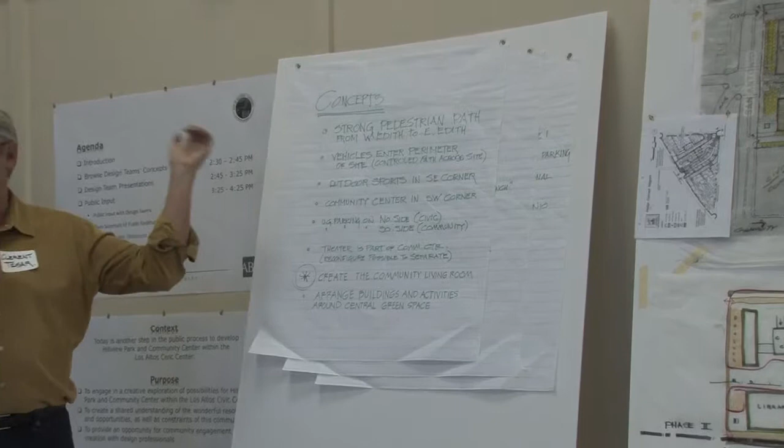I think we could start out with what we believed were the key concepts. Maybe I'll go over here. Thank you. It looks like we all drank the same Kool-Aid. We believe in a strong pedestrian path from West Edith to East Edith, reinforcing pedestrian and bicycle connections and downgrading the vehicular connections. And in fact, what we encourage is a north entrance and exit for civic vehicular traffic and a south entrance for community traffic.

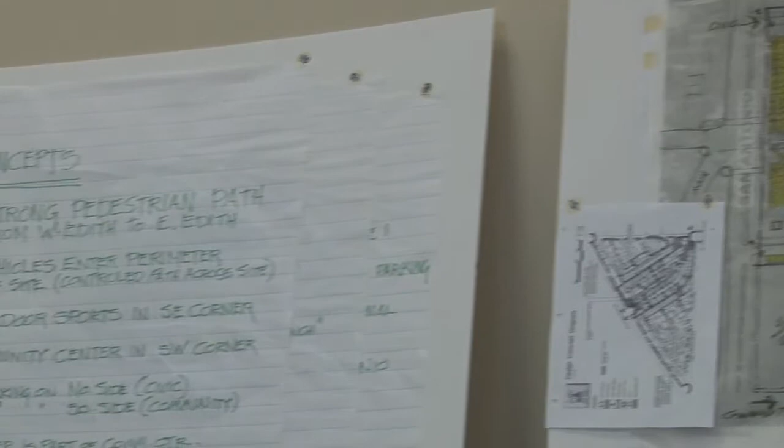We do have, I'm going to just jump right over to the drawing. We do have one connection. We flipped the police parking and relationship to the parking building so that we could have basically 2 cul-de-sacs of drive, but they would be connected. In my experience, the fire department's going to want that, and the police are going to want that. But we really wanted to decommission the road right down through the middle. That's the sweet spot. Let's reserve that for pedestrians.

Again, we identified all the outdoor sports to the southeast. They seem to have a comfortable adjacency. And the community center was to the southwest in this zone. A key concept is underground parking. It seems like that is your destiny if you want green space and all of the activities and all the buildings. But there is a challenge there, price, right? So as we did our numbers, we realized how important that decision is going to be for you as a community. It's not something the architects can solve. That ratio is cold, hard math.

We also grouped the theater with the community center. And in this scenario, we showed the theater tucked up against this property line, but with service and the dock and the scene shop tucked in here, kind of in the private side. And then the public side would be facing what we like to believe is the outdoor room, enlarging what you already have. I don't know if we want to go to specifics of the plan or talk about opportunities that are embedded in it. Peter, do you want to walk through the plan a little bit more, and then we can touch on opportunities and some of the problems or challenges in it? Okay.

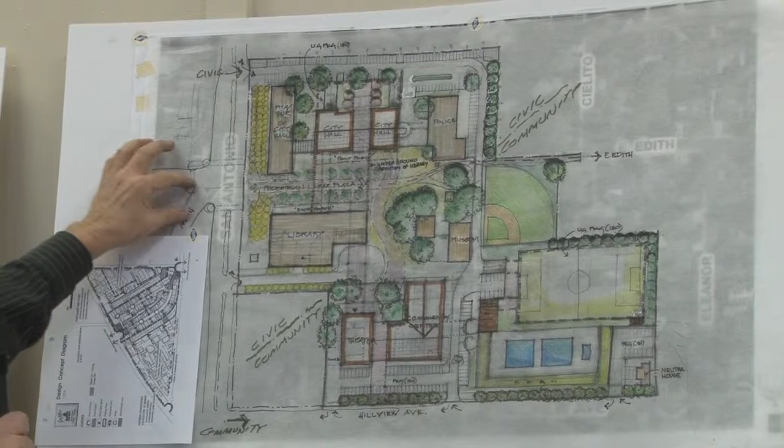Yes, well, we're trying to create sort of a real community feel here, and the connection, Edith, and this whole connection of downtown with State Street and Main Street coming together, we really wanted to be the main sort of pedestrian way. And so this is basically just sort of a community outdoor space that's connected with the museum space. And I think that's something that's typical of all of our schemes. And also we're connecting with Edith and leaving the ball field where it is.

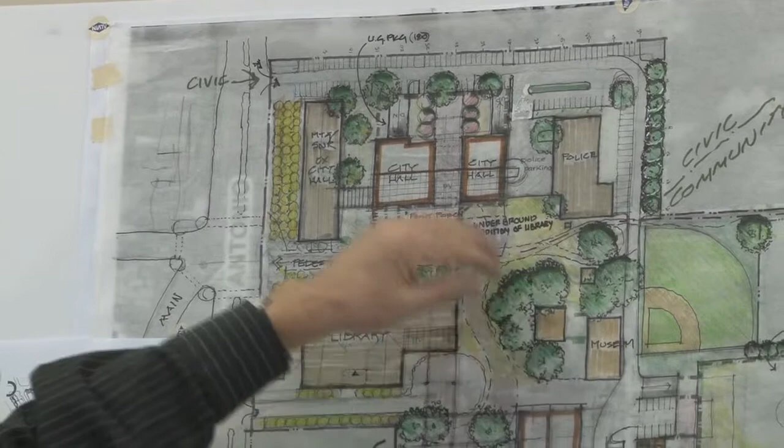We did sort of think about the second phase on how the government buildings would work too. So we thought we would keep the existing town hall or existing city offices where they were and put a new city office building here. This would be council chambers, these would be the offices, and keep this parking that seems to work pretty well and gives access to the police area, create an entry, and then this sort of pedestrian way would connect to this nice pedestrian plaza, connect with the library, connect with the museum, and also connect with the community center.

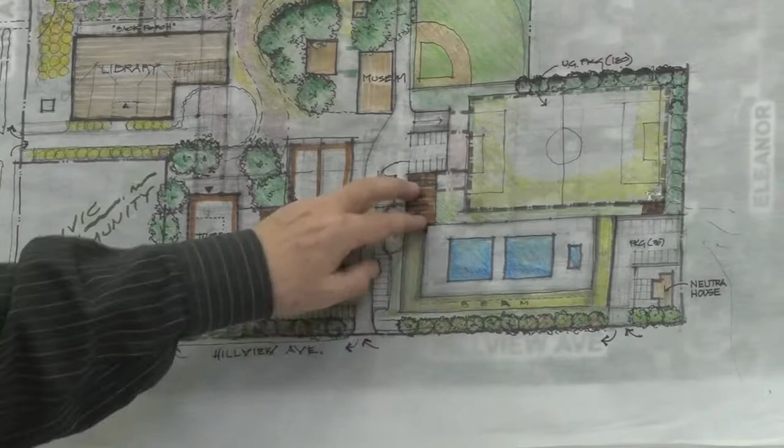Another thing that we were pretty conscious of was what was it going to be like on Hillview. So we took the community center and the theater, pushed it back, and put some parking to buffer or to increase the distance from the community center to Hillview. Also, we wanted to put the pool here and the soccer field, and what we thought we would do was build a berm, or about an 8-foot wall, and sort of maintain the treescape along Hillview, so it had a real residential feel.

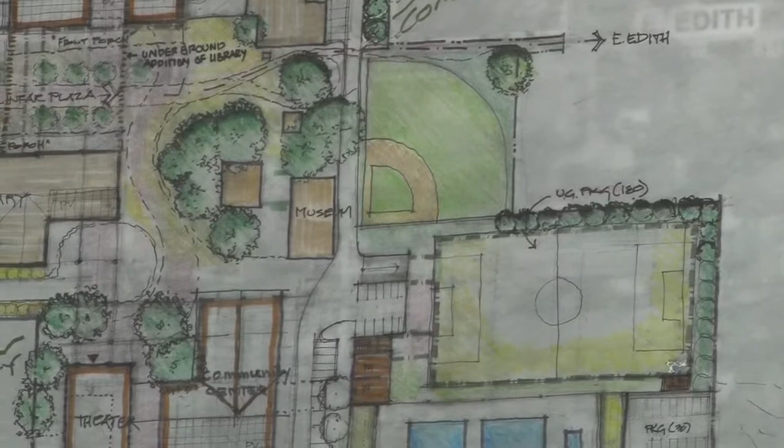But you wouldn't be able to see the swimming pools. There's sort of the sketch right here, kind of shows an 8-foot wall, a berm, and a street tree. So along Hillview, you just see sort of a natural streetscape, and it would sort of acoustically block the noise from the pool. And then we get the soccer field and the ball field working together. And I'll touch on a couple of opportunities that we see.

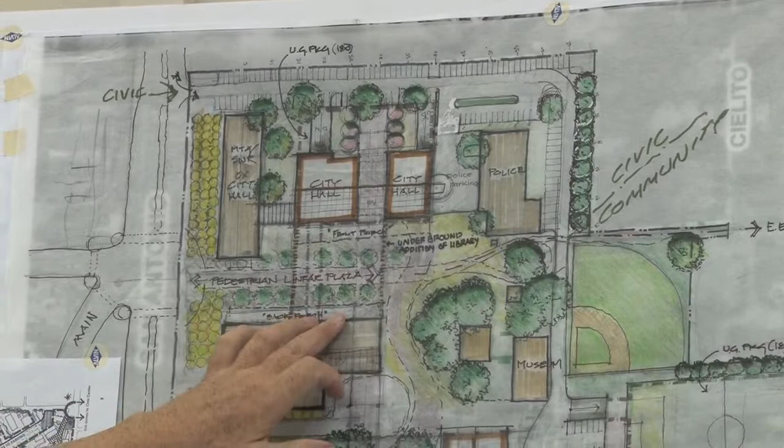By enlarging this outdoor green space, we start connecting all of these buildings visually to each other, trying to create that dynamic between them. We see a real opportunity to continue what we call the modern California ranch style. This building would remain, and this building would remain. We see this as essentially an annex to the new city hall. I don't know if this is clear, but we're visualizing that there's about 180 to 200 parking spaces under the city hall that are accessed from the north. And there's a connection for a future expansion to the library that would be underground. So there would be some clerestories or some skylights in the orchard as you walk through it. And that would connect the library now to all of the parking.

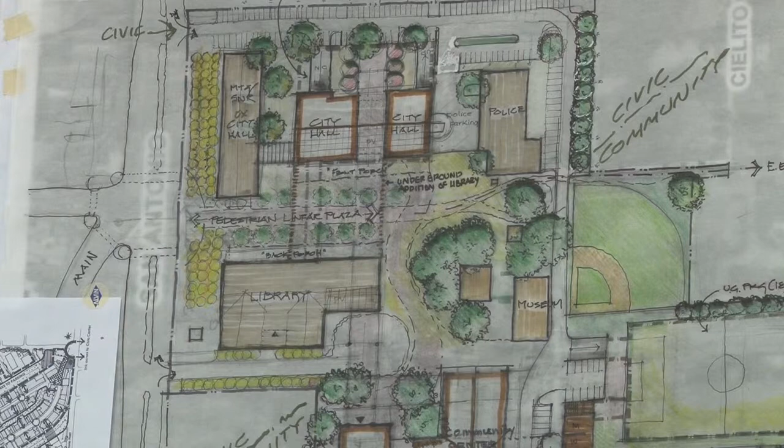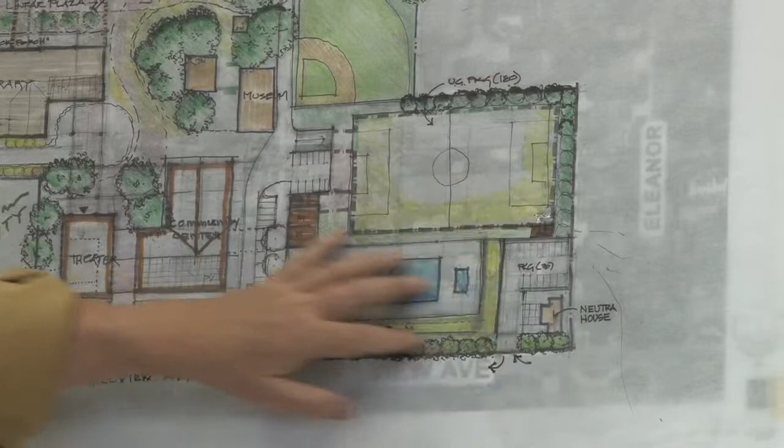We also think that there's an interesting opportunity to reinforce the Neutra design aesthetic, which is a little different than the California Ranch. The Neutra house has quite a bit of history. We see a couple of gazebos that can be possible that start to create a collage or an assembly of buildings that starts to feel like a mini campus, if you will. Go to the third one. We only have about 2 minutes left.

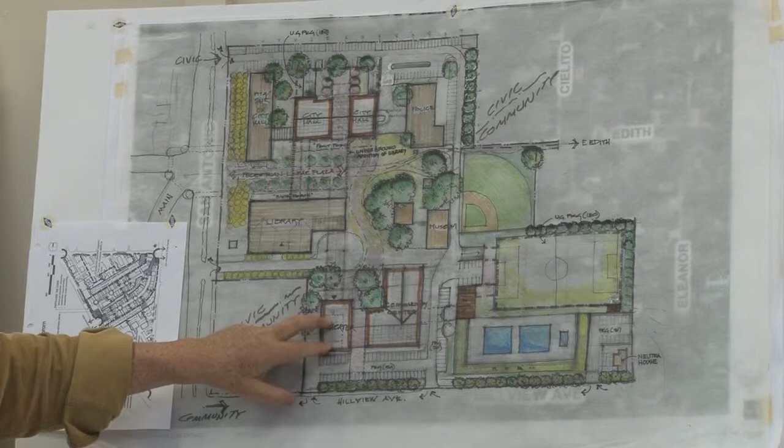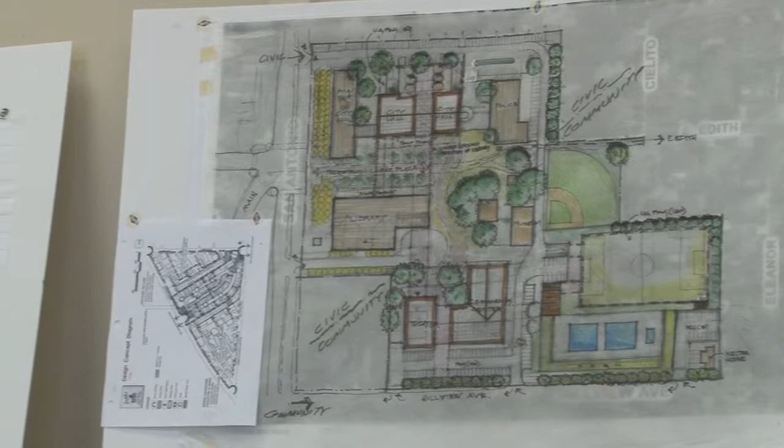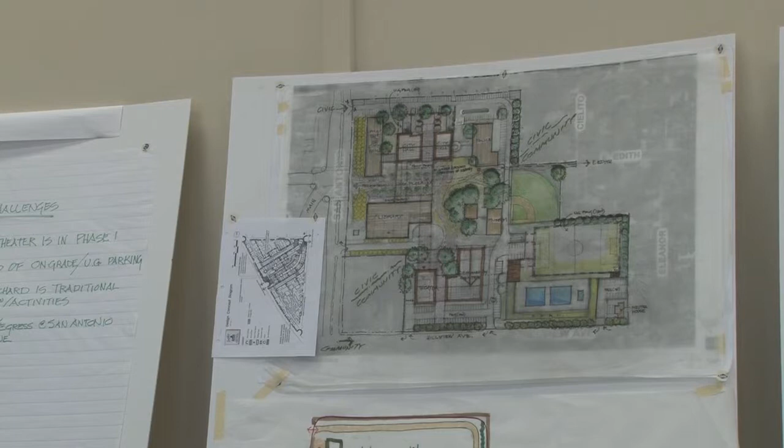These are your challenges, not ours. I want you to decide, is the theater in part embedded in the phase 1 work? If not, we would do what the Mauve team did and maintain the existing theater. Decide the ratio of on-grade to underground. We mentioned that a little bit earlier. Another interesting idea we had was, is the orchard a traditional orchard, or is it somehow integrated or upgraded? If there's sculptural skylights in the orchard, if you break down the orchard and it's only 3 rows deep on either side of the alley that you are walking on, or does it need to be a half acre, 200 feet by 200 feet? And vehicular access on San Antonio is still a challenge. We decided to duck it.